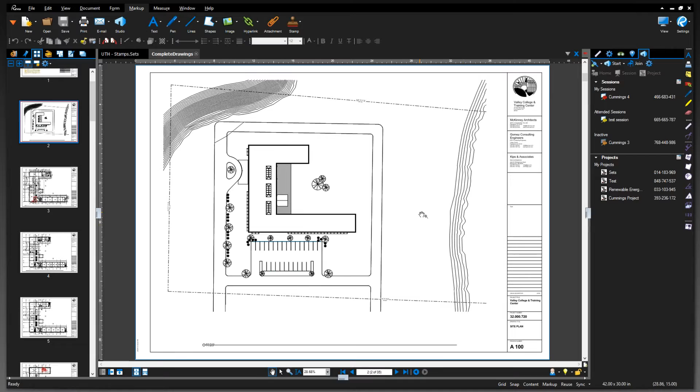How we would want to apply our own custom stamp into this for approval purposes. Now, if we look here on the title block, I'm just going to zoom in here, and I'm going to get to the seal area in the title block. And now this is where we want to apply our customized seal.

So when you install Bluebeam Revu, it gives you a customized set of stamps. Up here at the very top, we see the command bars, what Bluebeam calls it. So if we click along these tabs, we'll find buttons that are revealed when we click on them. So I'll click on Markup, and then I get to this button right here called Stamps. So I'm going to click on Stamp, and there's my list of stamps that come pre-installed into the program.

Now, if I want to show my approval for this, I can just get this generic stamp over here. I'll click on it, and now I get this loaded stamp icon, and if I just click in the middle here, I get my approved stamp. But that's pretty generic, and it doesn't really give us a whole lot of detail. What we'd really like to do is see our own logo and maybe the time and date that it's approved.

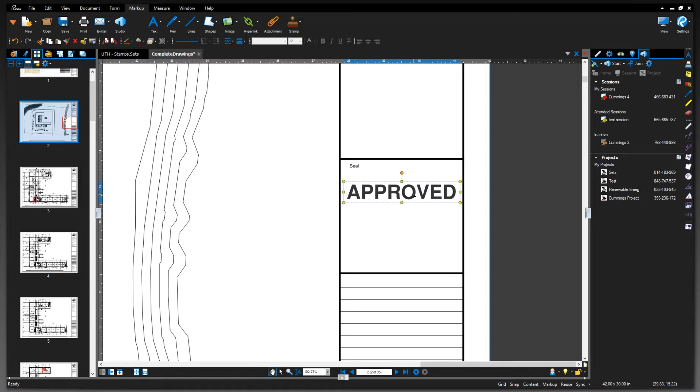So let me just get rid of this. I'll just right-click and delete. And now I'm going to choose something a little bit more detailed. I'll click on this seal option here. And then I'll just click and drag, and that gives me the constraints of where the stamp will be placed into.

Now you can see as I apply the stamp that it says seal of approval. We could probably just put a logo there or something. And it has a date, and this is today's date. Now the program is actually using something called dynamic text, which means it applies the current date when you apply the stamp. But even here, we have a little bit more customization, but it doesn't really fit our purposes. So let me get rid of this.

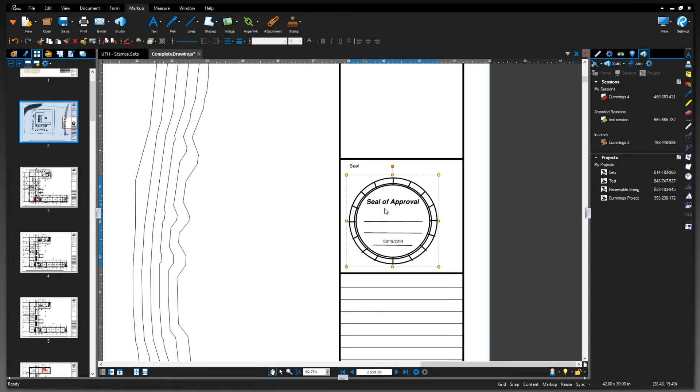Now we're going to go create a new stamp. I'm going to go up here to the stamp list and choose Create Stamp, and I get this dialog box. This dialog box allows me to customize the borders of the stamp. So I'm going to choose more of a square border that's 4 by 4, like so. And I'll just hit OK. And here's what we get.

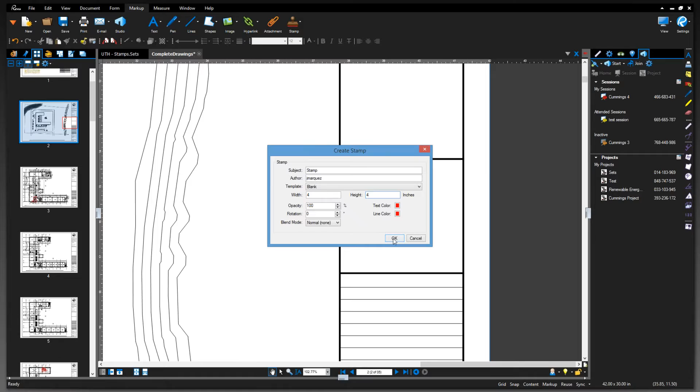We get this, what is actually a PDF file. Bluebeam makes it easy to create stamps by making them into PDFs that you can modify in the same way that you can modify other PDFs. So we have a PDF area here that we can work with, and I can create text boxes in here. But what I want to do first is find a logo to work with.

I'm just going to click on the image button, and that gets me this dialog box where I can choose the orange blade logo to place into my stamp. So I'm going to choose this right here, and then I'll just click and drag to put the orange blade logo right in there. This is really a scanned image that we're using. So I just dropped it in there.

I'd also like to put my signature in here so that I have a scanned signature that I use. I want to make sure that everyone knows that it's me and it has my approval. So I'm going to go back up to this image button and find my signature, and I'll just drop it in there like so. So there's my signature that I've just added to my stamp.

Now we also want to talk about using dynamic text as well. So I'm going to go up to this button right here and choose text box. I'm going to apply my text box right here on the page, and I'm just going to draw a border around it so it constrains it to that area. Now look what you get here when you apply a text box.

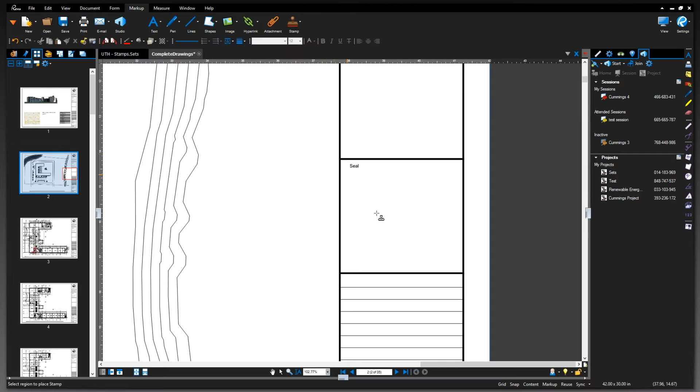And now back in my drawing, I'm going to apply that very same stamp, like so. I'm just going to click and drag to constrain the borders of the application right to that seal area. And there we have it. We have our logo, a signature, as well as a time and date that it was applied.

So that's stamps in a nutshell. We're really just touching the surface of these three features, but we want to get through this area so we can get to the next one. This is a nice way of handling this really simple application.

Now, as I said before, we have a 35-page document here, and one of the things we probably don't want to do is go to each page and painstakingly apply each stamp to that same seal area on the title block. But we know that the title block is the same for every page, and that seal area is going to be in the same position on each page.

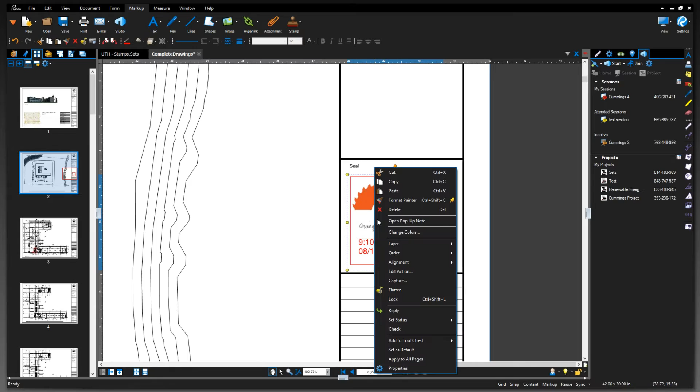So if we want to apply our seal to every single page in that same area, we can select the seal, right-click on it, and choose Apply to All Pages. And then that applies the stamp to every single page in the document. So that's a really handy way of dealing with these kinds of large documents.

But with our large documents, we have a lot of other problems that come along with them. As I said, we're only dealing with a couple dozen pages here, but what if your document set is hundreds of pages? That presents a couple of different problems. One is that they are very large and bulky. They could be hundreds of megabytes, even gigabytes in size if you have really large PDFs.

And that makes them hard to deliver to multiple users. It also makes them hard to send, mostly if they have low bandwidth, if they're on the job site and they just want to look at one single page. If you have a 100-page document, they have to download the whole thing.

And now we have even bigger problems than that. What if we want to revise one of the pages but not the whole document? Are you going to make corrections to one page and then deliver the whole document again? And how do we keep the history of all those revisions? How do you make sure that everyone knows what the earlier revisions are, but also make it clear what the latest revisions are?

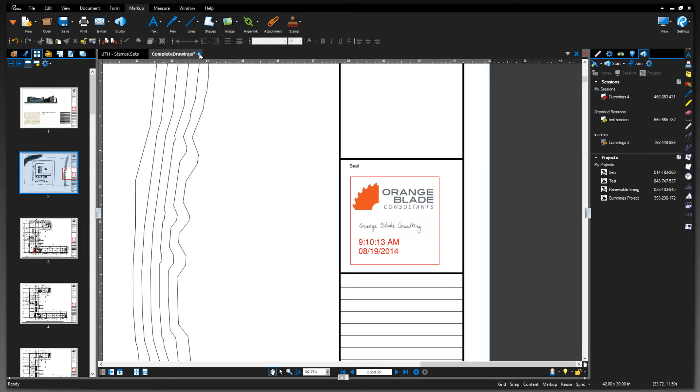Okay, so we have our 35-page document set here, but I'm going to close out of it because I've taken the liberty of breaking down the 35 separate pages and naming them appropriately according to page name and revision number. So let me just close out of this, and I'm not going to save any of my changes.

And I'm going to go over to my Sets tab. Now, I have it made visible here, but it may also be hidden for you. So if you don't see it right away, you can also go down to this upside-down orange arrow over here. This is the Tab Access menu. If you click on it, you can easily access any of your tabs. And here's the Sets one. So I'm just going to choose that. And here's my Set panel.

Now, this is empty right now because we don't have anything open. So we're going to create a new set by clicking on this button here on the far left. And we get this dialog box here. This is the focus of how to create a new set. Now, I'm going to add the individual one-page documents that I've broken down from the larger document by clicking on this Add button.

In this folder, I've named each page appropriately, according to the plan name or document name in the title block, and I've also taken care to make sure the revisions are named appropriately.

I'm going to choose all of these pages because I want them all in one set. I'll click the first one, scroll to the bottom of the list, hold down Shift to select all of them, and hit Open. Now it's not opening up all those documents—it's listing them, creating a list so it can keep track of each one without having to open or combine them.

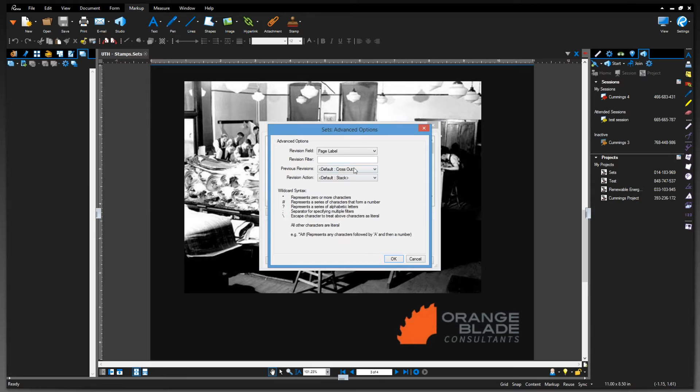I've used the naming convention of the letters REV, a space, and then a number to represent the revision number, so I'll type REV, space, and a pound sign to represent the number. The other thing we want is to make sure the program is looking for this revision in the file name, not the label of the page. You can organize your page labels with the same naming convention, but for this exercise I'm using the file name.

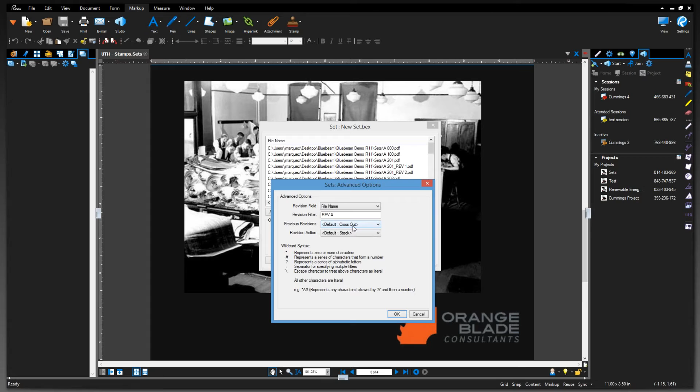Now we also have several options showing how to group those revisions. I'm just going to choose the default here. What I want is to stack the files and revisions in a single stack, which I'll show you in a second, and each prior revision will have a red X through it so we know those are not the most current revision. That looks good to me, so I'll hit OK.

I've got everything else set up properly, so I'll hit OK again. And so there is our set. As you can see in the document area, none of the files have been opened yet. In reality, Bluebeam is just referencing these individual one-page PDFs and not grouping them into a single PDF—it's using these as reference pointers so it knows where they are.

As we scroll through this, it looks just like our 35-page document, but here's one difference: when we get to A201, we see that it is a stack and not a single page. What we have on top is revision 2, as we can see here. But if we click this left arrow button, we can scroll through the revisions—here's revision 1, and clicking again, now we're down to the original.

Now if we want to view them as a document, I'll click on the top revision in the stack, and it opens the file, so it knows where to go to get that one-page file. If we click the Thumbnails tab, we can see it is, in fact, a single document, not part of a group document.

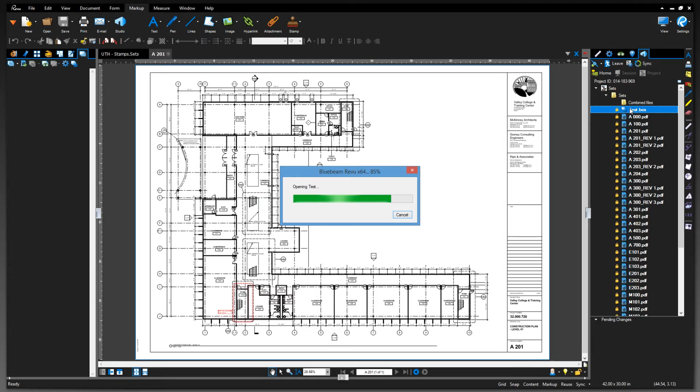But the best part about this is that multiple users can access them without requiring one machine to be available to everybody. So here we are. We have that same set that we were looking at earlier, but instead of having it live on my personal computer, it's actually living out on the cloud. So we have these same stack of revisions over here that we can access. So Bluebeam does, in fact, give you unlimited storage space. So just because you purchased Bluebeam Revu, you can access that storage space as well.

Now, we have another component of Bluebeam Studio that is very useful. It's something called Bluebeam Studio Sessions. Studio Sessions allows multiple users to interact with an individual PDF without having to modify that PDF. It allows multiple users to interact with it at the same time. And to demonstrate this, I'm going to take this same revision that we've been looking at here. I'm going to look at revision 2 right now, and I'm going to right-click on it, and I'm going to have it connect to a new session. And I'm going to call it Orange Blade Session.

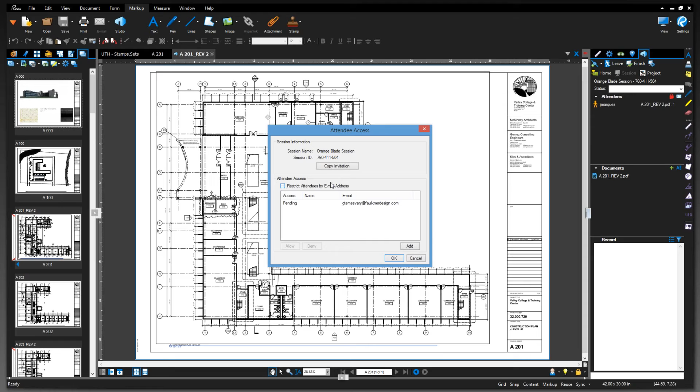So I'm going to have my colleague John open up this session. The session ID is this 9-digit number right here, and oh, actually, looks like I have to make this session available to other people. So I'm just going to go into the security settings right now, uncheck this restriction, and hit the OK button. Okay, and that should make it available to other users.

So it looks like we've got Dale involved as well. Hi, Dale, and John's there as well. So we've got a couple people who have joined the session, and now I'm going to invite any participants here to just go ahead and add some markups to the page. And just go ahead and do that.

Now, as you can see, as each user is adding a markup to the document, the record window is detailing the actions that are being added to this session. Now, the beauty of this is that this record window takes care of the accountability problem. All the reviews and agreements and actions are tracked in sort of a legal proof document that can be stored along with the archive of the session once the session is complete.

And as these markups are added to the session, we can see that only the original user of the markups can make changes to the markups that they add, and that is vital for the accountability issue, because it means that, let's say as a general contractor, the architect can't go in after the fact and change the markups that you made onto the plan.

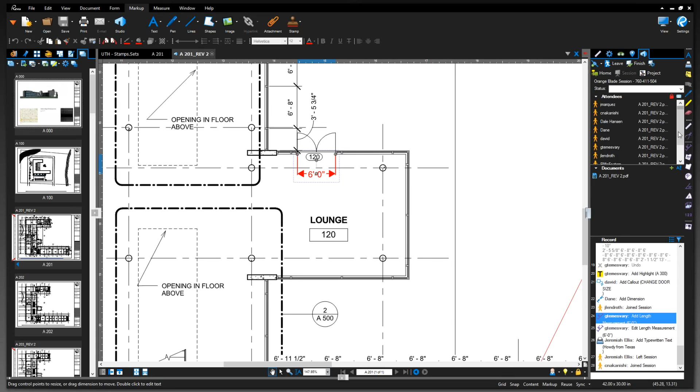It's called following. If I scroll up to Brent's name—and it's taking a little bit of time for GoToMeeting to refresh the screen—but if you hover over the name of a particular user, you'll see a set of footsteps, an icon that looks like shoe prints. If you click on that, you'll be able to see someone else's actions, and not only their actions, but their own particular view. So Brent right now is viewing the screen at the full view.

But if he zooms in to the document, we can also see how his magnification changes. Or if he adds a markup, we can see exactly where and how he's adding that markup. So it's a useful tool that allows a group of users to follow any individual user, and this is particularly useful in a war room scenario in which one leader wants to present a plan set to other users.

So, of course, once again, we are only scratching the surface of this feature, and there is a lot more to say about Studio. So it does look like we're at the end of our time here. I'd like to open it up to questions. If anyone has any questions that they'd like to ask, John will forward them to me if there's any general interest here. I don't really see any questions that the webinar as a whole is looking at. So we'll just wait a couple minutes to see if anyone else wants to add a couple questions.

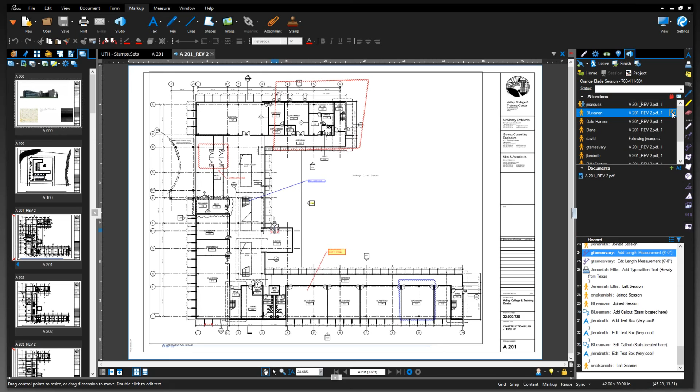It looks like there's one question here: how do you log into the server? I assume that means the Bluebeam Studio server. That's one of the features under the hood that we'd need to talk to you about directly. Basically, you would use the Bluebeam interface to get an account, generate an account with the Bluebeam Studio server. If I can log out here, and if I wanted to create a new user, the first time you log into the system you would click on this button, and it'll prompt you to create a new account. That's available to you as a Bluebeam user. Once you do that, you have all the features of Bluebeam Studio available to you.

There's a question in the Q&A asking if sets will work with ProjectWise. That's a very good question. I believe it will, because ProjectWise is just considered to be a different storage location, and because the XML files that Bluebeam uses to reference all those file locations for the files it's adding to a set are just tracking them by the file location path. So as long as you have your ProjectWise Explorer running, you should be able to link to a ProjectWise location. Same's true for SharePoint, by the way, if you have your file stored on a SharePoint location.